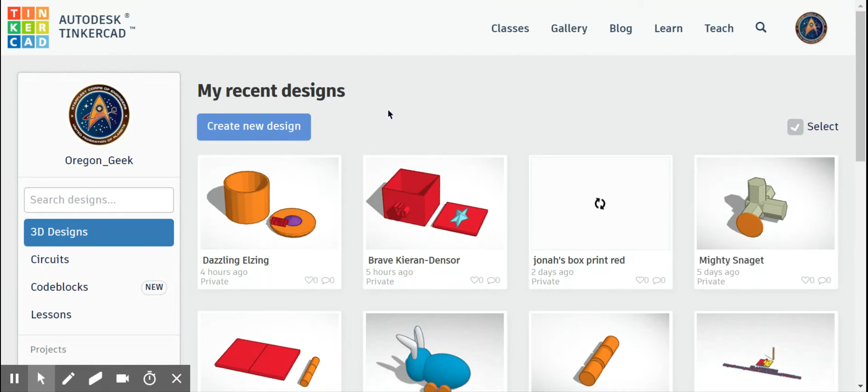We're going to create the box today, and we are going to start by creating a new design. That will have Tinkercad bring us into a new work plane.

I'm going to go ahead and just make a square box. You could make it out of almost any shape, but square works pretty well. According to the instructions, the box can be no larger than 50 by 50 millimeters and 40 millimeters tall. Our box here is 20 millimeters by 20 millimeters.

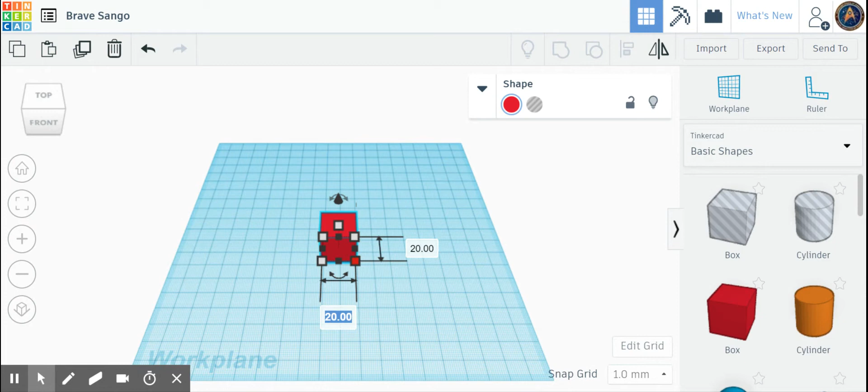So I'm going to click on one of the white squares, then click in these areas and enter in the sizes: 50, 50, and no more than 40 millimeters tall. This is the maximum—you can make a smaller box if you wish.

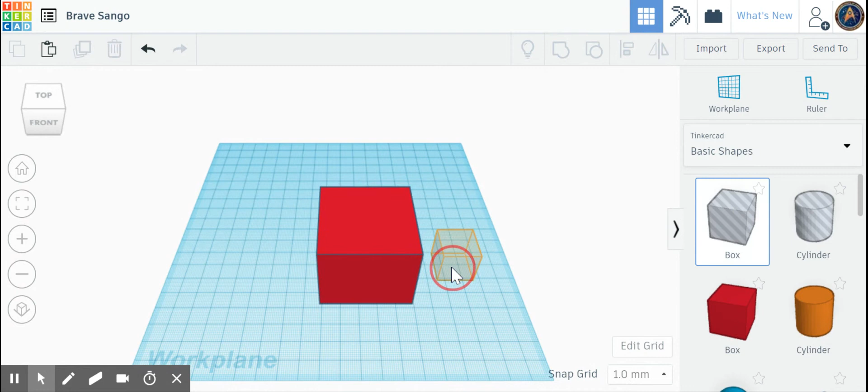Now that we have our square out here, we're going to need a hole for the center of our box, otherwise we just have a solid cube. I'm going to bring a box hole shape out and resize it so I can have some walls around the inside of my box.

So I'm going to resize it to be 47 by 47. And I'm going to make it really tall, because it doesn't matter how tall our hole is. I'm going to drag it into the center of my box.

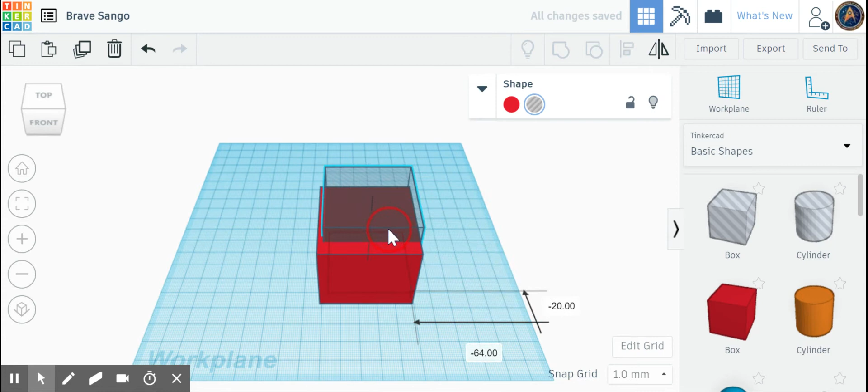Instead of sitting here and trying to line it up and spending a lot of time getting it lined up, I'm going to drag and select both shapes, and click on the Align button. If I center it here and here, when I now look at my box from the side, everything should be centered in place.

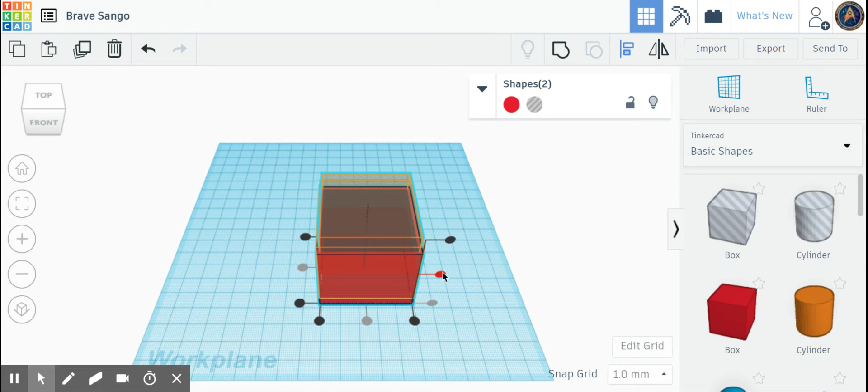I don't want to center it here, because then the box shape is centered really strangely, and we don't want that. Now my problem is, if I go ahead and group this, which is going to create a hole, the way I selected it I now have a hole in the bottom of my box. So what I'm going to do is go back and ungroup it.

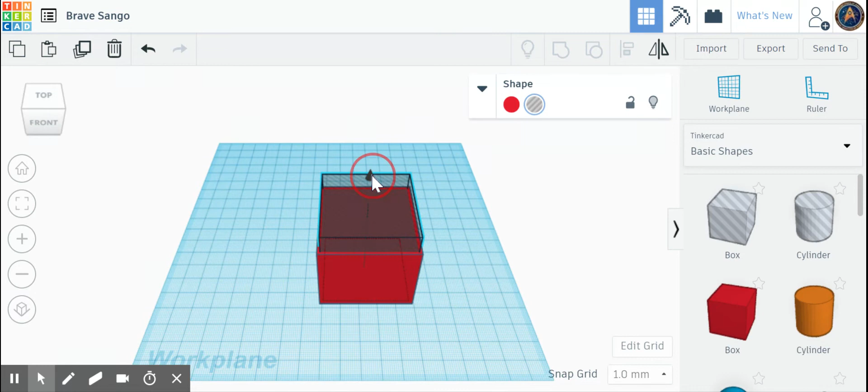I'm going to take this inside hole, use this cone shape that's now red, and lift it up, probably about 3 or 4 millimeters. If I select them again and click group, now if I look down from the top, I have a bottom to my box.

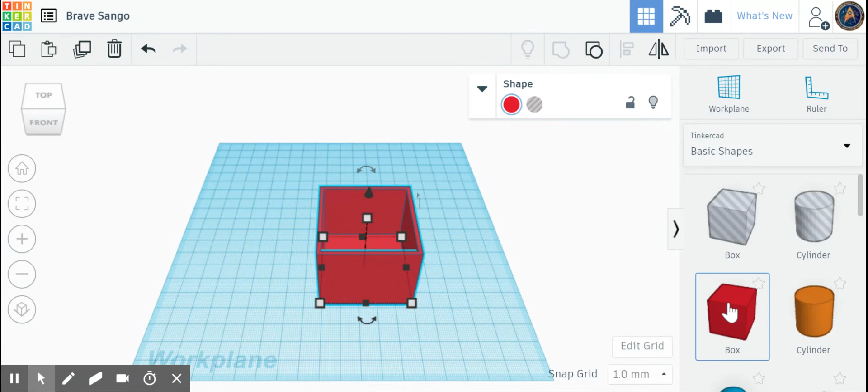Great. Now I need to get a lid that fits in there. So the inside of my box, the hole I used, was 47 by 47 millimeters. However, if I make the lip of my lid that size, the way it's 3D printed, it won't fit in very well. So I'm actually going to make my inside lid lip be 46 by 46.

I'm also going to make it a lot shorter—about 3 millimeters tall. So now that piece should fit inside the box.

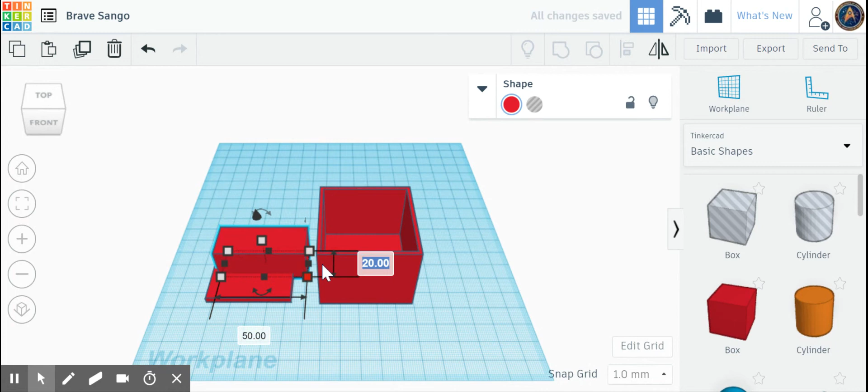But we don't want it to fall through, so we need to put the rest of the lid on, which, if we want it the same size as the outside of the box, is going to be 50 by 50. I'm going to make it about 4 millimeters tall. You can give or take some of those.

Now I've got the lid and the lip, and again I could line it up and figure out a whole bunch of stuff, but I'm not going to. I'm also going to raise the lid a little bit above the lip, because if not, it would be the same height. I'm going to look at it here.

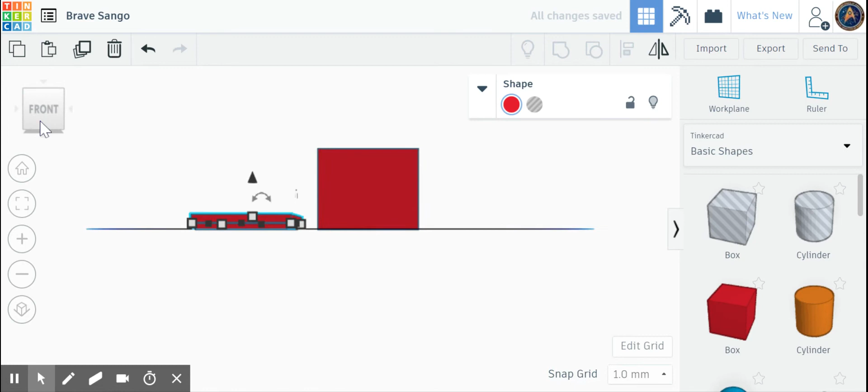Okay, I've got my lip, I've got my lid. Go back to top view. Now I'm going to select the lid and the lip together, and align them as well, that way I know everything's centered. Okay, now we have a lid that fits on top of our box.

But according to the instructions, we're missing 2 more things. We need a handle on our lid, and we need text on our box. So let's go with the handle.

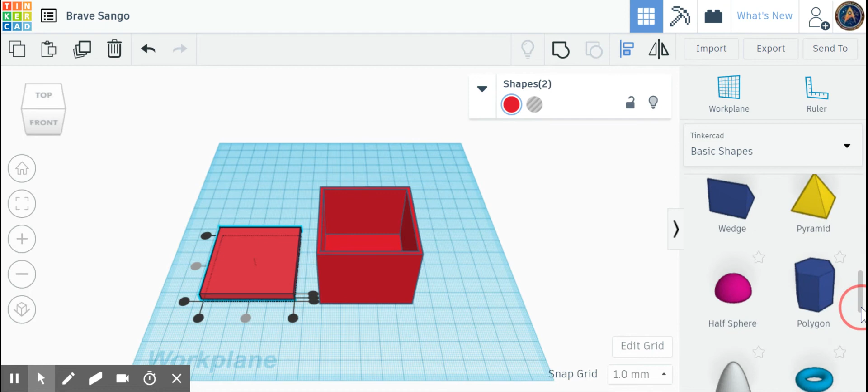The handle can be no more than 5 millimeters tall. Please do not use the ring. The ring does not print well as a handle. Neither does anything that sits down there with a tiny point, like if I turned this cone upside down and tried to make it a handle.

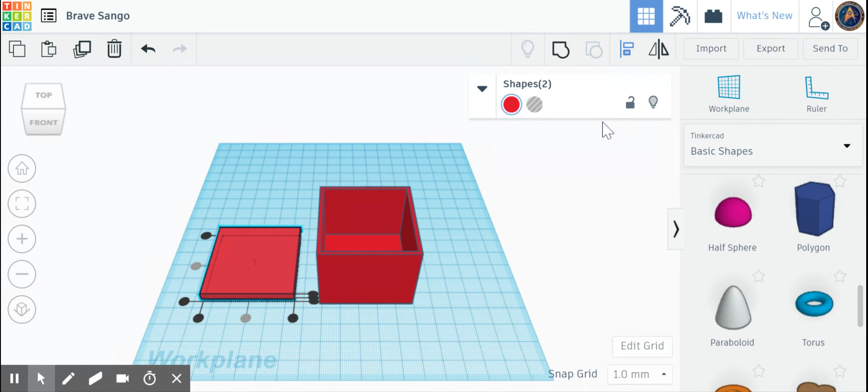I'm actually going to use probably a half sphere, and I want to put it on top of my box. I could put it out there and use the cone to raise it up, or I could put a work plane right on the top. Now anything I put on there is going to be right on the top of the box.

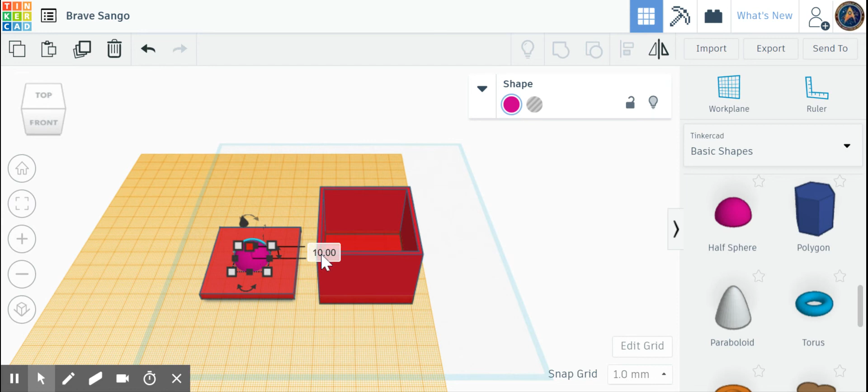I'm going to pull this half sphere out, set it there, and it should be right on my work plane. See, it's right on top of that. Perfect. Now let's see how tall it is, because I can have it only be 5 millimeters. So I'm going to click here, turn it into 5. Great. Now I've got something on the top of my box for the handle, and it's 5 millimeters.

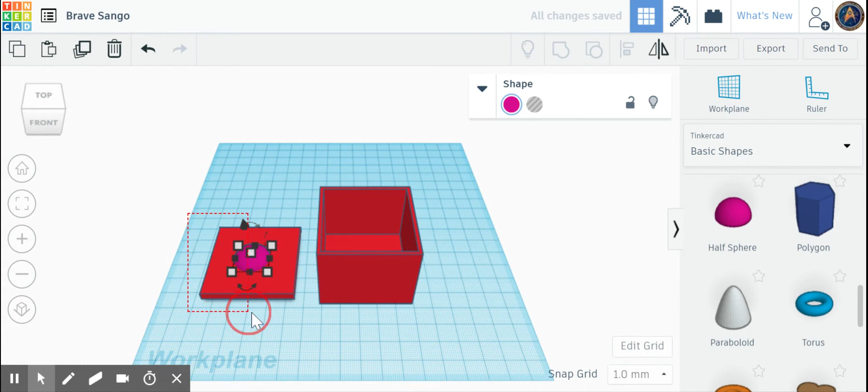Everything's fine. Now to get rid of that extra work plane, I'm going to drag another work plane out to the blue line over here, which then vanishes my work plane. I'm going to select everything here, and I want to make sure my handle's in the center, so I'm going to use the align tools again. Group. Now we have a lid and we have a box.

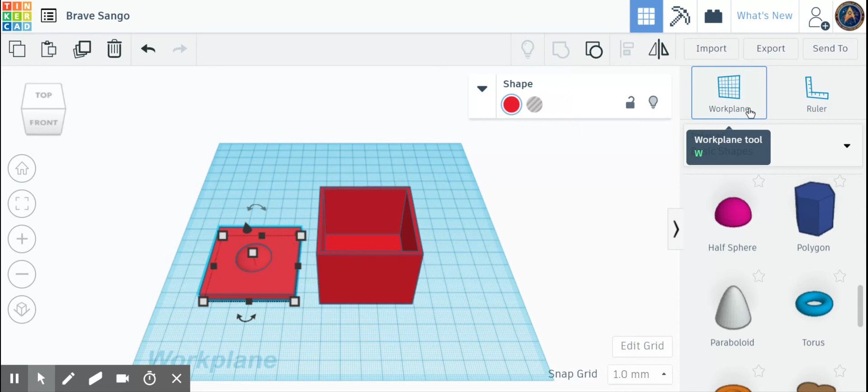Lastly, we need some text on the box. Again, I could pull out some text and rotate it and put it on the side of the box, but I'm going to pull out the work plane again and put it right here on the side. Now anything I pull out is going to stack right there.

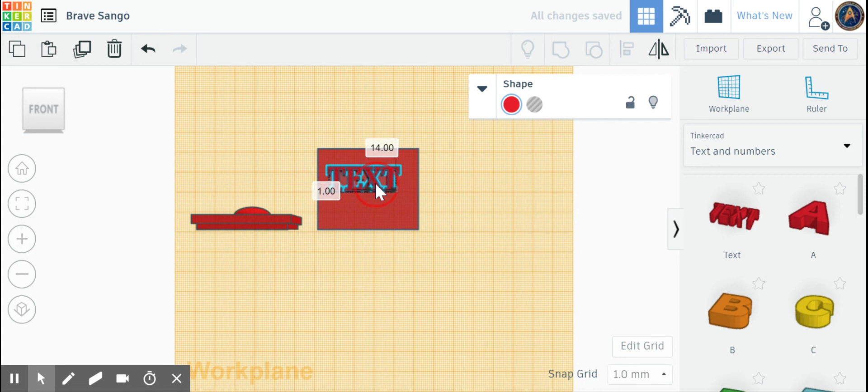So I'm going to go into Tinkercad and write text and numbers. I'm going to pull out text. Now do you see how it goes right on that work plane? Perfectly on the box. I'm going to have to make it some smaller, shrink it up. Do not go too small because the 3D printer isn't able to print really tiny text. And I think I'm going to say hello.

So I'm going to select that, go hello. Perfect. Enter. There's my text. It's on the side of the box.

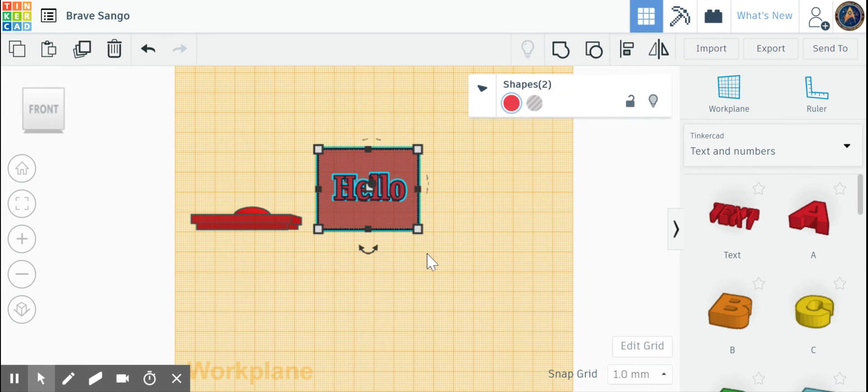If I wanted it centered on the box, I could select the text, select the box. I could even align it here. Centered, centered, done. Now I can group that. Whoops, I don't want to group it with the lid. Let's group that. Boom. Now we have the box and the lid.

I want to get rid of that work plane because it's going to drive me nuts there. Okay, let's put it back down to the blue line. There. We have a box, we have a lid. I'm also making sure the lid is moved pretty close to the box, so the 3D printer can print your lid and box right next to each other.

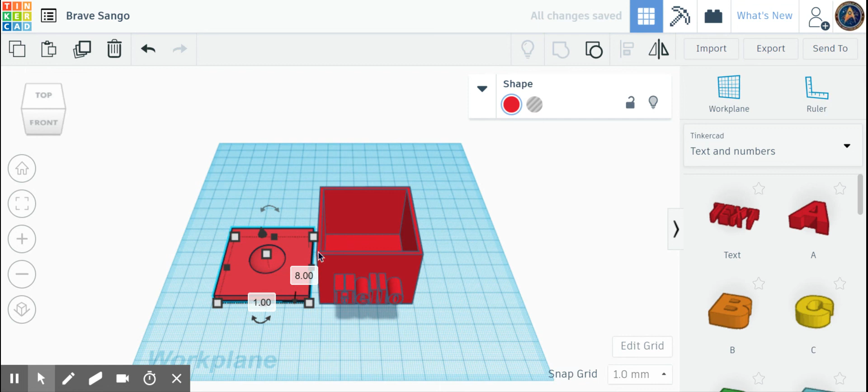Lastly, before I export it to turn it in, I'm going to go up to the title and name it with my name and what color I want. Green. So I want my box to be green. I'm going to hit enter.

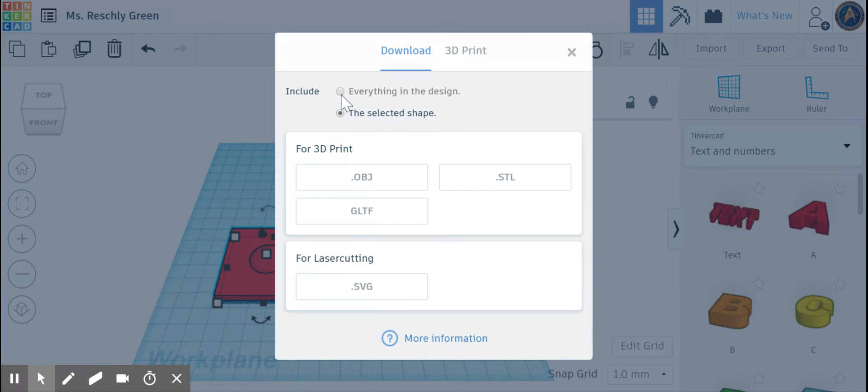There we go. And now I'm going to go export. I don't want to export the selected shape. Some of you might not look at this before you export .stl. I want everything in the design. Okay, when it's exported, then I can upload it into Google Classroom and turn it in.